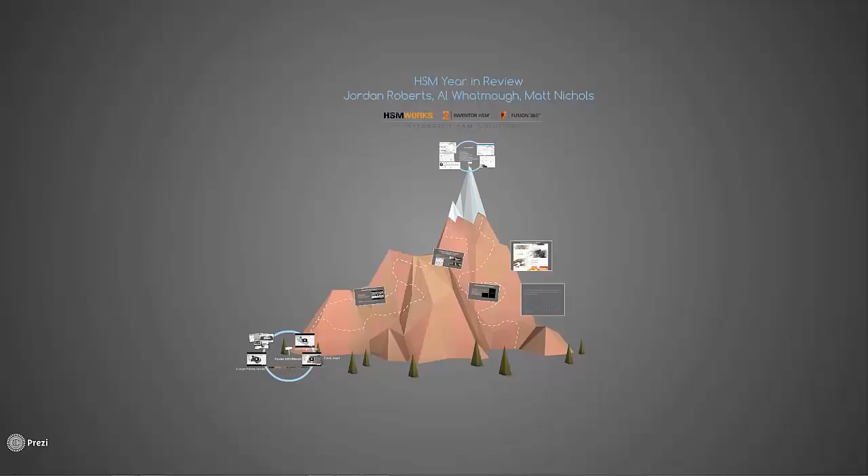All right, so we've got all that covered. We're going to hop right into the HSM Year in Review.

So Al, real quick, how's the mountain looking? I'll take Al's silence as it's looking great. Sorry, it's looking good, Jordan. I had myself on mute.

You're doing such a good job there. No worries. Awesome. So we're switching it up today guys. We normally do PowerPoint presentations, but I thought, look, this is the HSM Year in Review. We've had a lot of fun stuff happening. We're gonna take you on this journey, and it has felt a bit like climbing a mountain. So first of all, I'd like to introduce the Fusion 360 Ultimate Platform.

For those of you that don't know, Fusion 360 is the product development platform that is much more than just CAD/CAM. We're incorporating an IoT property of it as well. You're going to be seeing some absolutely phenomenal technology based around this platform.

This truly is at the center of what we call the future of making things. You'll see a lot of content out there from Autodesk describing how manufacturers have been forced due to consumer demand and changes in the marketplace to change how they manufacture products and literally retool their shops to be more competitive. With the introduction of Fusion 360 Ultimate, you will receive a lot of the capability that you'd currently receive inside of Inventor HSM and HSMworks packages. And the price point is just absolutely phenomenal.

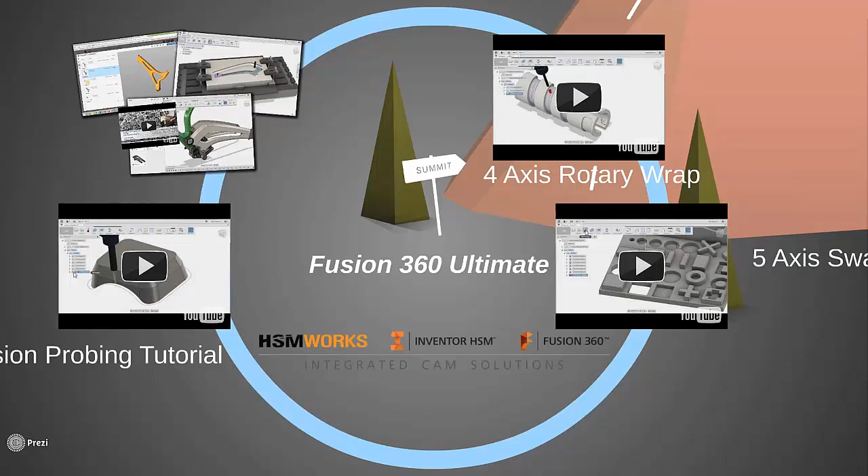I want to bring everybody's attention to this because really why it's important for our customer base is the Fusion platform allows you to collaborate with everybody on your team in a way that wasn't really possible before this product even came to market.

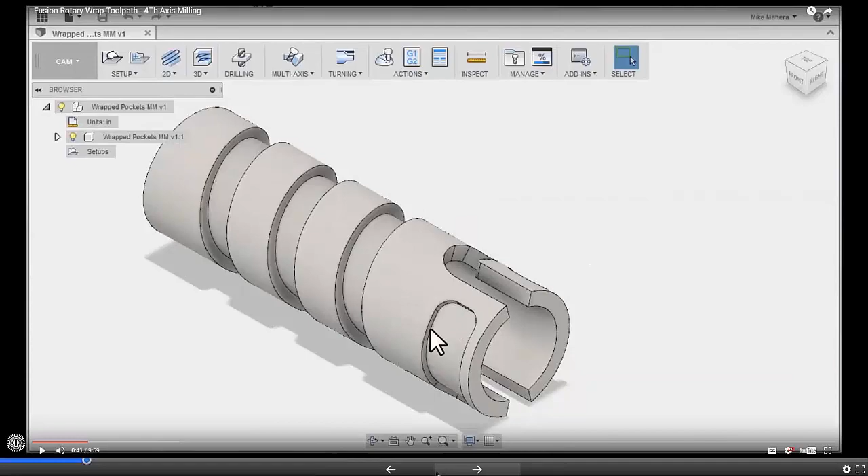Now we're going to jump in. Fusion 360 Ultimate, you've got 5-axis capability inside of it now. Again, Mike Mattera doing a great job, new to the Autodesk team, and just adding a ton of value with this content.

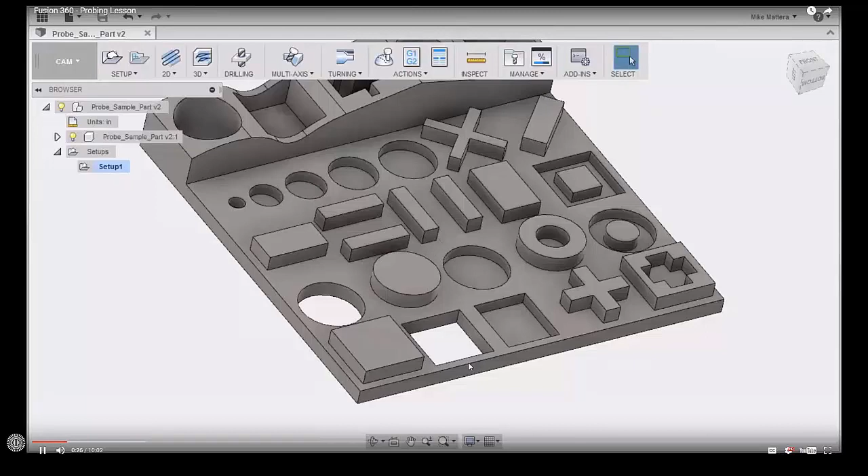Al, I believe you might even be able to show us some tips and tricks inside of Fusion later on. Is that accurate? Yeah, I think we'll show you some probing like this in Fusion. I think we might even show some 4-axis in Inventor and try and dive into a couple of the products later.

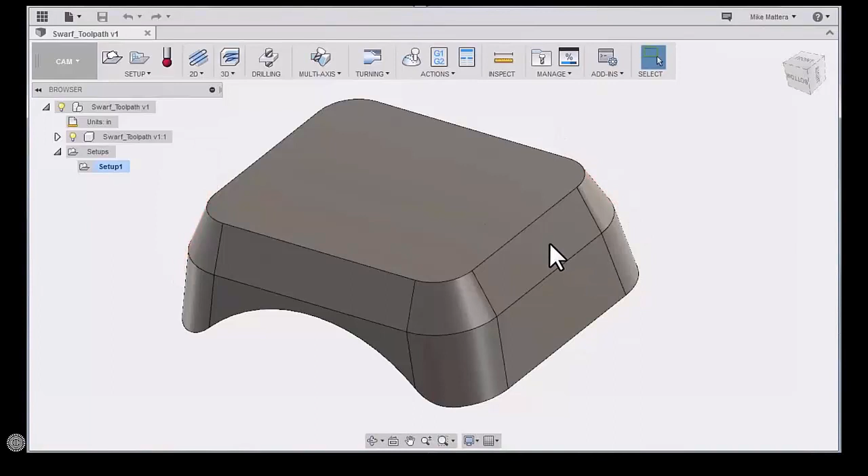Yeah, that's awesome. And I tell you guys, I've been really laser focused on the Inventor HSM and HSMworks platforms for about 2 years now, and seeing the speed at which the Fusion team is able to release new developments, new technology is just, there's nothing like it in industry. If you guys haven't tried this yet, you owe it to yourself and your business to download a trial and take a look. Especially if you're a SolidWorks customer, you guys are going to really, really love this stuff.

So as we continue our journey up the mountain, I want to take a quick second and stop on HSMworks 2017. Our SolidWorks customers have been patiently waiting for a release and some new capability.

Al, really quickly, could you just maybe touch on a couple of the things that we really want to be showing today inside of the SolidWorks platform? I think we might have lost Al there.

Anyways, we've got a new release of HSMworks 2017, and we're going to be showing you exactly what we're bringing to market here later on in the podcast. So I don't want to take any of Al's thunder, but you can read just as well as I can. These are some of the line items that we're looking for inside of that new release.

As always, we had a really big year with the education team. For those of you that have friends and family that are students and educators, you might have heard of the name Ivan May. We've been working very closely, and Ivan specifically, he's been working with the H-Techs. We've been getting in front of the students. The students have been rapidly adopting this technology.

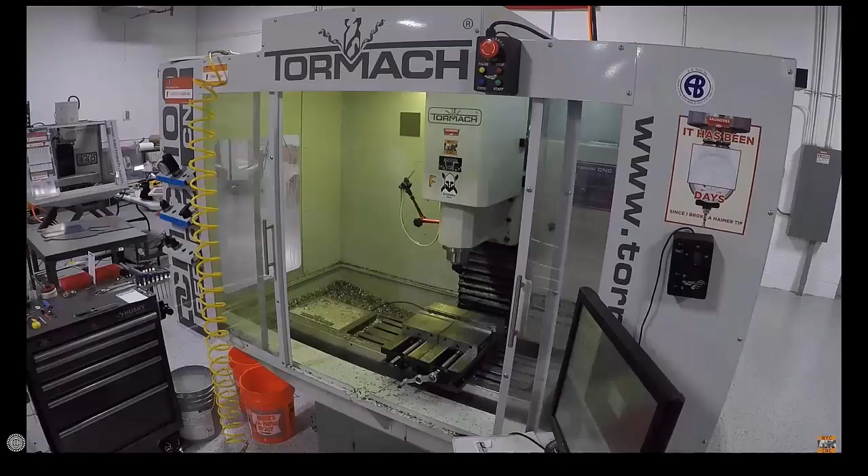And just really quickly, I want to dive into the precision pumpkin. This is John right here, and John uses a lot of Tormach. He uses Fusion. His channel is adding a ton of value here. What you're seeing is John setting up a pumpkin inside his Tormach machine. I understand a lot of you won't be doing this, but he's really providing the community with great resources outside of the Autodesk community.

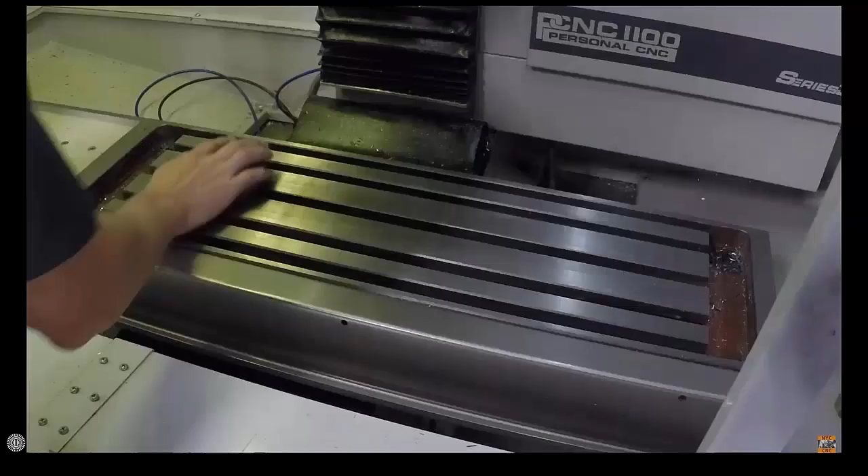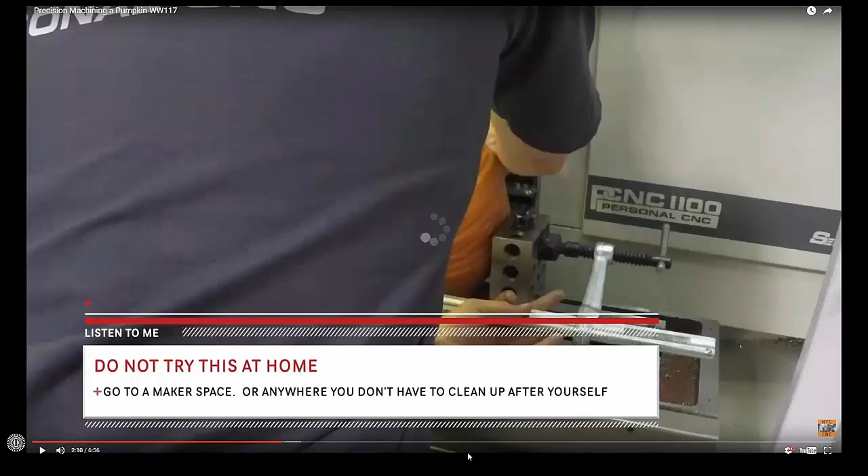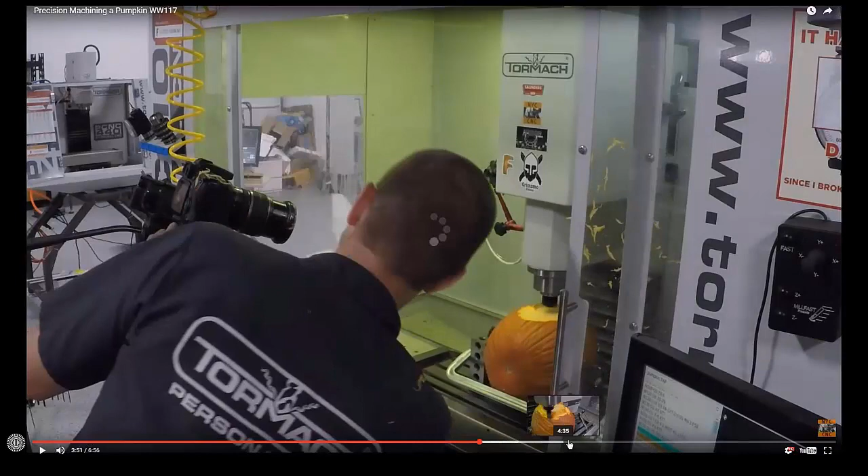We also have our Expert Elite program, which we'll touch on later. This is great - I wish the audio worked for everybody so you could see. We'll fast forward to some of the fun stuff. You can see we got our pumpkin modeled up here, and now we're making some seeds fly. Some pretty fun stuff here.

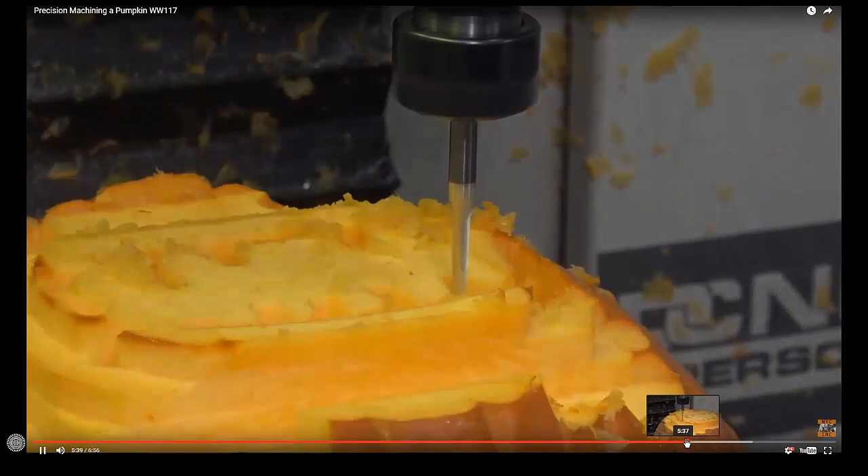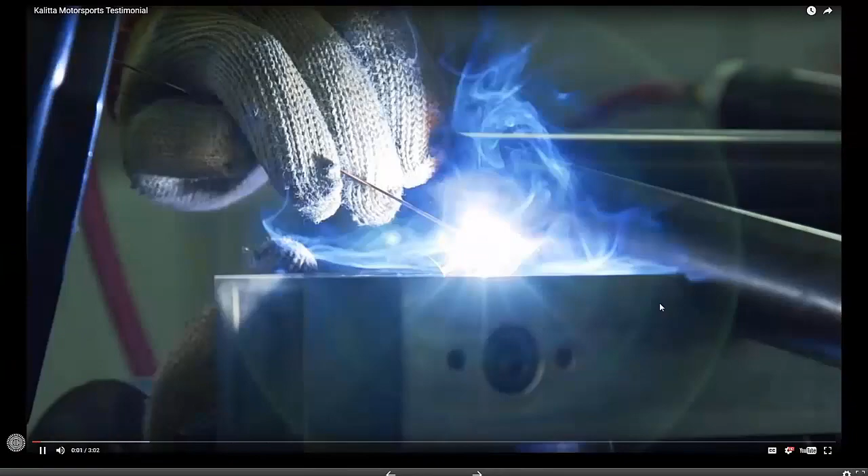I also want to bring attention to our partners, Kalitta Racing. These guys are doing phenomenal work, and they're using Inventor HSM. If you haven't seen this video already, please take a look. For those of you interested in motorsports, these guys have a great shop. They run Haas, they run fast, and they're always in the winner's circle.

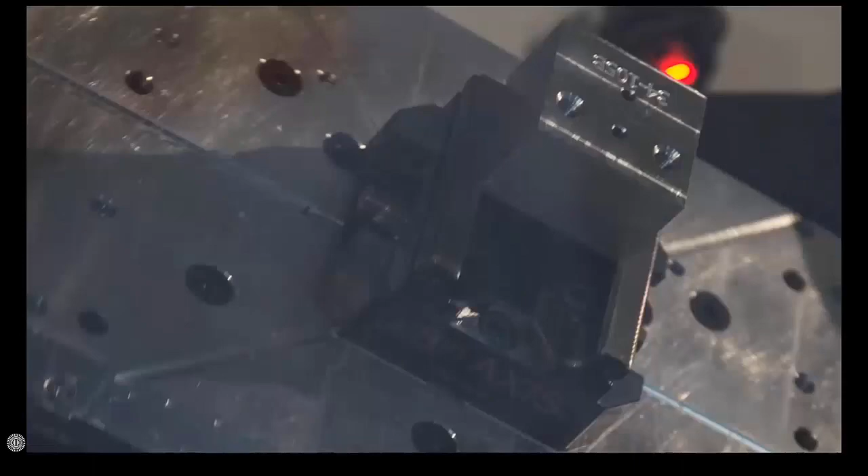Top Fuel Dragsters - that's a precision game. These guys were able to use Autodesk technology to really streamline their process and operations and become more profitable, more efficient. And that ultimately is what's getting them into the winner's circle. So here we're looking at Inventor HSM Pro. We got Tim Evans.

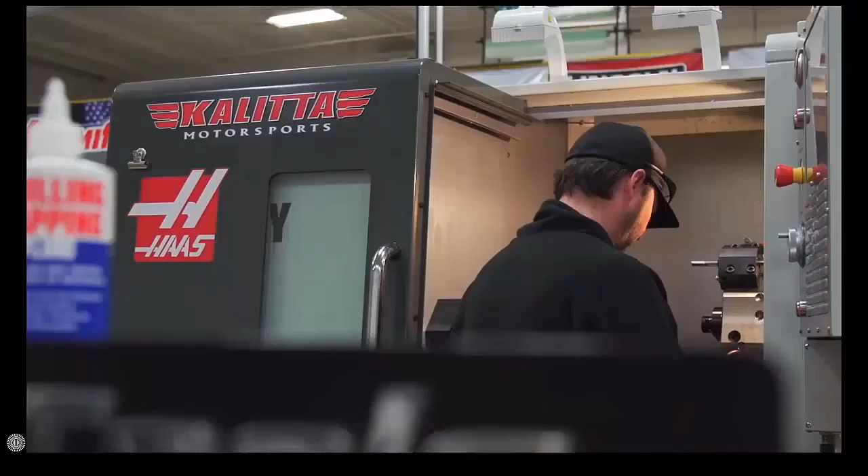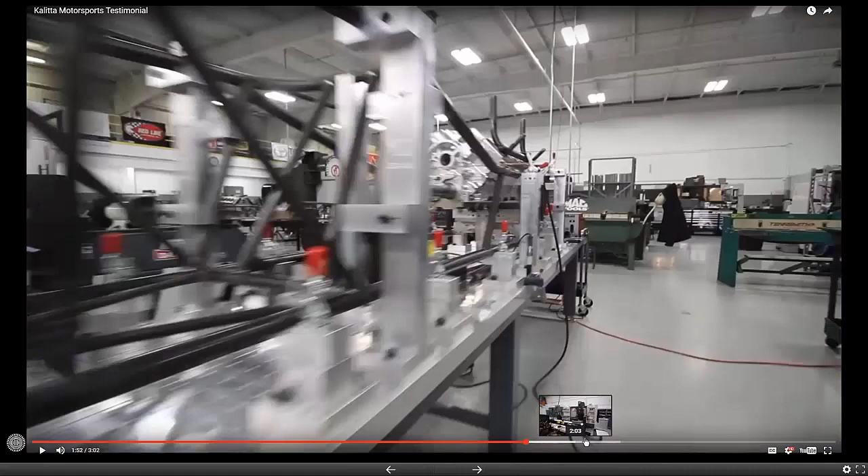I'd encourage everybody to follow Kalitta Racing - they've got some really great stuff going on over there. You can see some of the parts they're making with Inventor HSM technology, just great stuff - really, really short cycle times, really short programming times. And that gets back to the nature of why we're all here: it's that integrated CAD/CAM workflow that's truly changing our industry.

It doesn't matter whether you're on Inventor, SolidWorks, or the cloud - it's all good, the workflows are all the same.

I'd also like to highlight Titan. Our boy Titan over at Titans of CNC has launched a free training program. For those of you looking to step up your career, this program is completely free. You can sign up at academy.titansofcnc.com. Here's Titan talking about how he's able to give the software away for free because he's got his awesome TV show, which if you haven't seen it, please check that out as well.

I've been through some of Titan's program, and I can tell you this is not a marketing thing, guys. This is Titan truly giving a phenomenal free education platform for those interested in the HSM workflow. You're going to learn a ton, but it's much more than just software - Titan's actually showing you how to start your own machine shop, how to be successful, how to compete, how to run fast, and how to win.

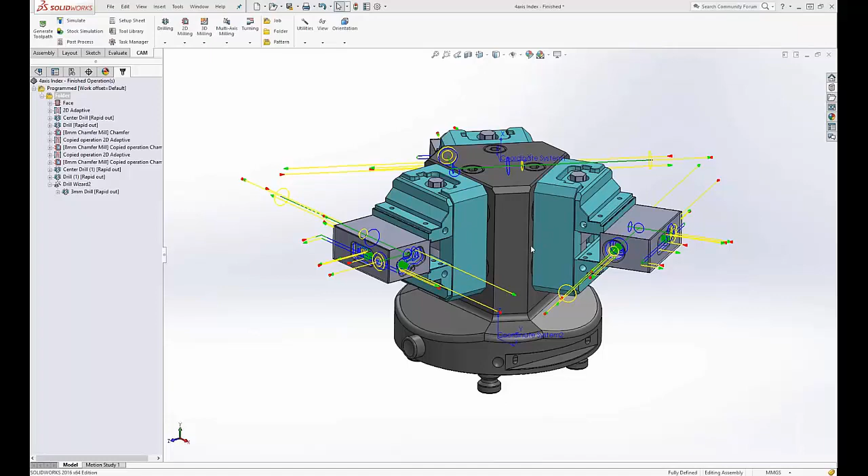Okay, so this is an example of some multi-axis positioning, no new toolpaths that I'm showing in this one, but I wanted to draw attention to some of our users using third-party simulation tools. That could be something like a CAMplete, it could be a VeriCut, it could be an NC Simul. Many of these tools give you third-party validation on your expensive machine tools. You don't want to check your own homework, you want to sometimes use a third-party tool.

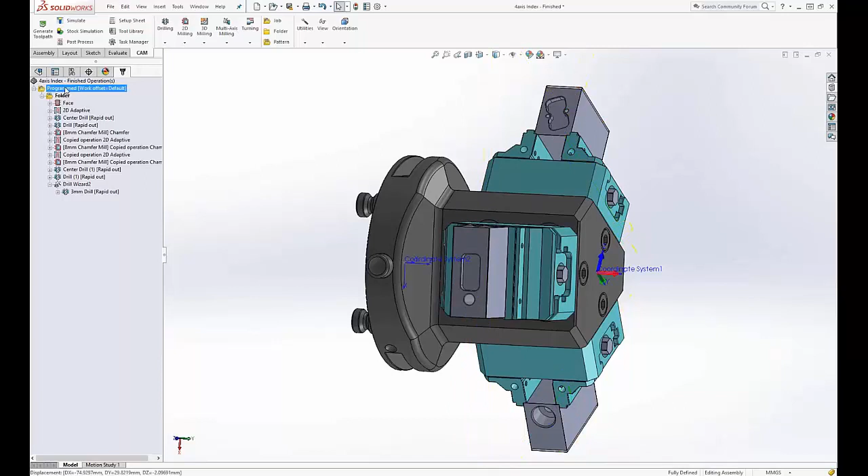And what we've done for those tools, and you'll continue to see additional post-processors for some of those that appear in the near future, if you look in the work coordinate system, in the model, the fixture definition area, there's now a spot where you can define the fixture attach point. And it may appear that that doesn't do anything.

And it doesn't when you're simply using the product as standalone. But when you go to use one of these other post-processors, we can package up the stock model, we package up the tool path, we package up the data about the tool, and that passes over for this other simulation. This gives you a place so that it's a single button click to import into these other tools and do your simulation. So that fixture attach point is going to be helpful for some of those advanced workflows for those third-party solutions.

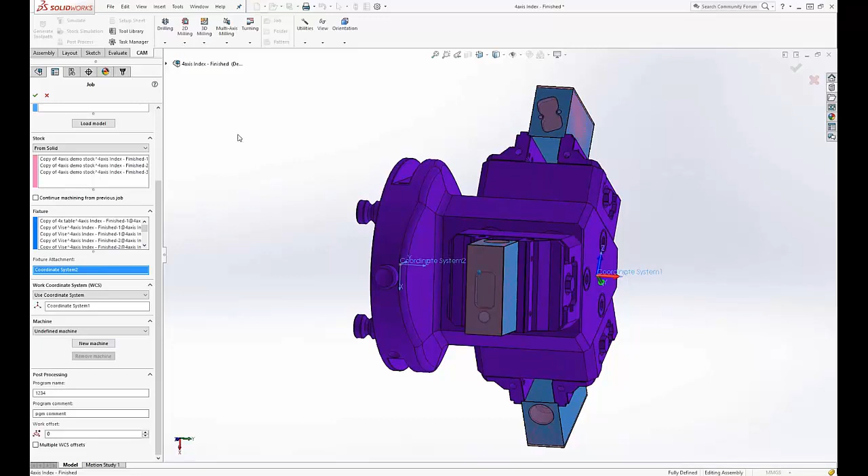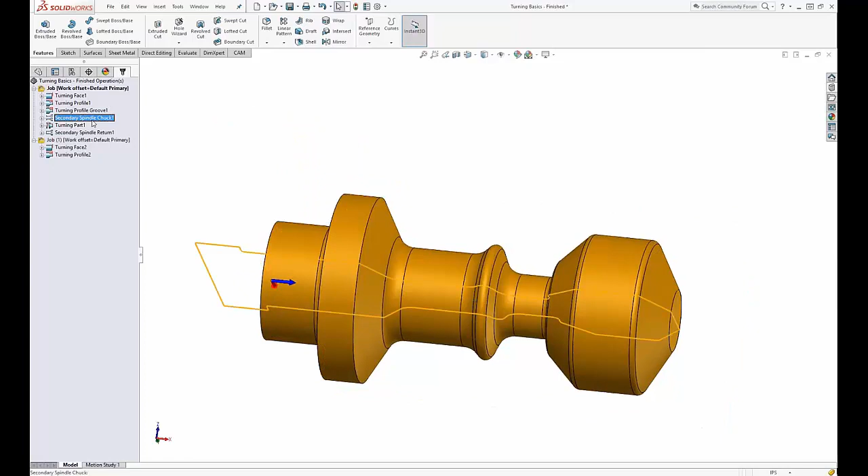The next thing I wanted to show, which is rolling out in both Inventor HSM and HSMWorks 2, and will be in Fusion very shortly, is our updated secondary spindle operations: spindle chuck and spindle return. In this case, I have a job machining the front side of my part, then I'm going to part it off and finish it in the secondary spindle. I need to come in, grab that part, and transfer it. You'll see an option for spindle chuck to grab on. We can perform this parting operation and return that secondary spindle back to start doing the work.

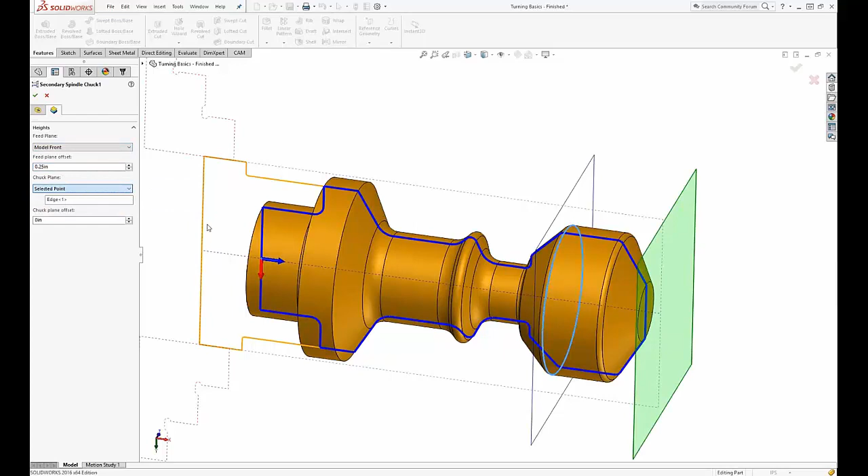Some things you might notice start to highlight where we're headed with confinements in turning. If you look at the heights plane for where this chuck happens, it's starting to look more parametric, like our drilling operations and planes in milling, where we can reference from the front of the model plus an additional offset. We can grab onto a selected point, reference from the stock back or stock front, starting to make more associative relationships to these sorts of planes. So expect to see the same sort of thing trickle into how we confine our turning toolpaths.

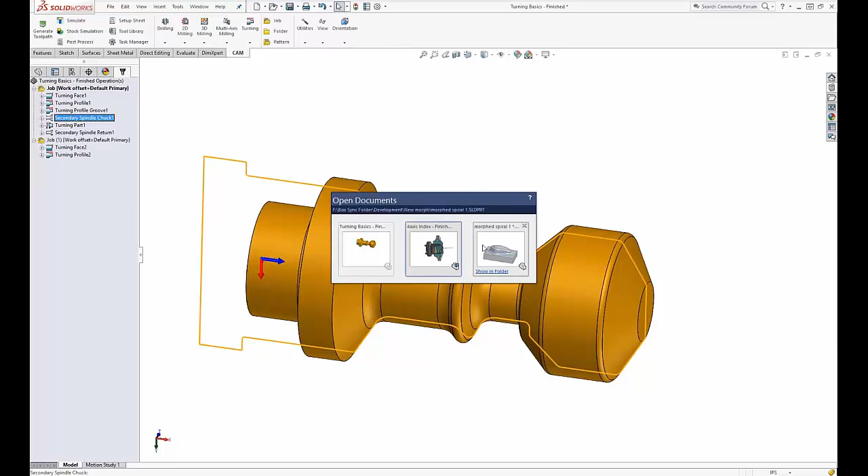I think that was worth pointing out. The last thing is something that's in beta mode. There's a few people on the webinar today who may already use beta mode. If you're not using beta mode, you can. I don't suggest using it in production, but we do like to expose the stuff we're working on that's getting close, for you to test and see how it's going.

Beta mode is easy to turn on, so here's a little hint for those who took the time to join the webinar. If you hold Control and Shift and right-click, you'll get a new right-click menu. This appears in both desktop products. It's a slightly different workflow in Fusion, and you have to be more careful there because it doesn't automatically turn off when you reset. In our desktop products, if you restart the application, you won't be in beta mode until you force it on.

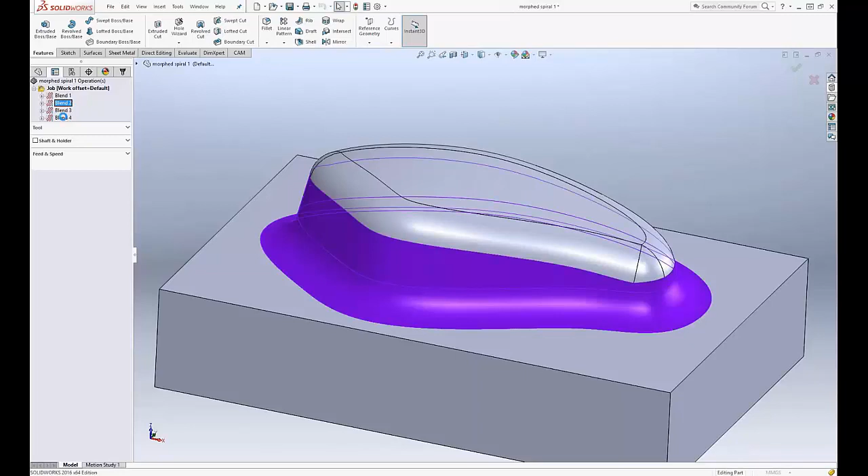But here's some new toolpaths coming out very, very soon. It's our blend toolpath - I think Rob Lockwood started the Instagram tag 'blend is the new flow.' You can test this now, where it allows a constant step over across a series of surfaces, useful in situations where you may have used flow in the past without setting up the ISO curve. It's as simple as setting the faces I'm machining, and it essentially morphs between the two. This will be the foundation for some true 5-axis finishing too, since we've now got toolpath lines laying correctly across the surface.

Neil is mentioning in the comments that he started the 'blend is the new flow' tag. So not only is he all over our forums, he's all over Instagram and part of these webinars too. Another shout out for you, Neil.

I'm definitely looking forward to seeing what you have. This is a great place for you to engage on the forums, engage with us socially, and let us know how it's going. These beta features are actively in development, so we can provide quick feedback when you're finding things - please continue to share it with us.

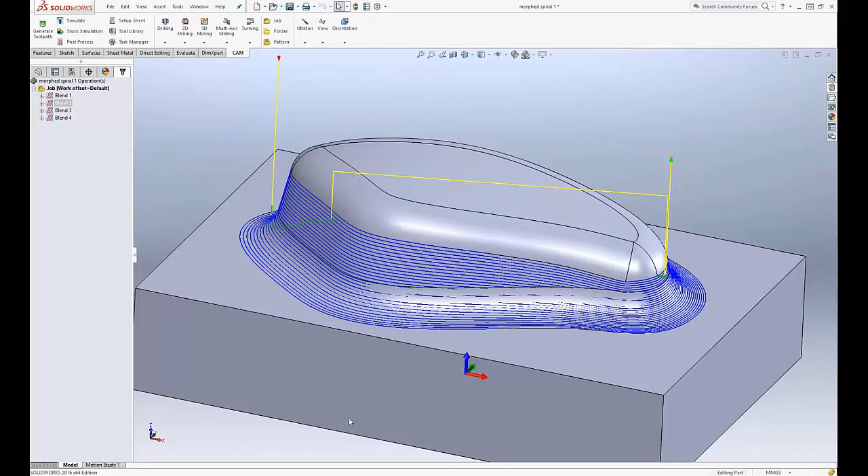I see some people asking about beta mode and Fusion, so that's probably a good chance for us to transition over to Fusion. There's obviously a lot more happening in HSMWorks, but let's try to hit all three products here.

The first thing I want to draw attention to is that over the course of the year, we've really put a lot of effort into making sure we deliver a solid set of example files, so you can reverse engineer what's going on in the software, and new users can see how to use the product in different scenarios. If you're helping other users, teaching, or answering questions, I really encourage you to go to those sample files. If you want to share stuff with us that you think would be useful, please reach out.

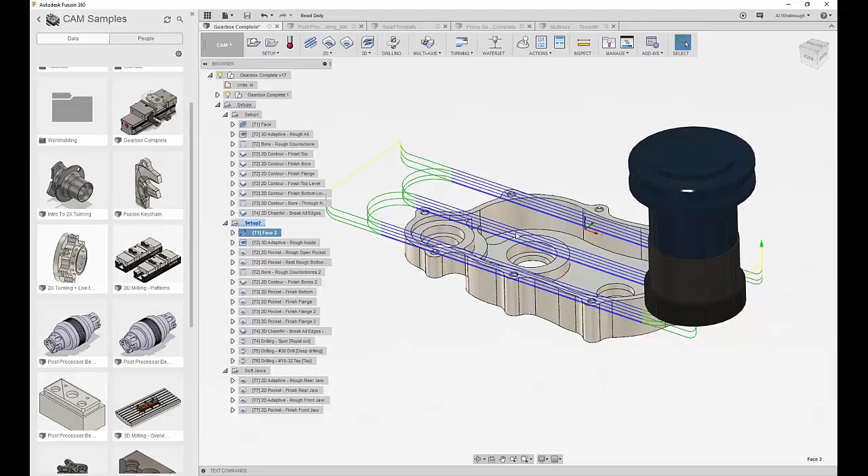In this example, I'm showing a gearbox housing, with maybe a couple of neat little tricks. I can show how I've got two sets of vices that I can toggle on and off here to define each of my setups. In this case, it's my second setup.

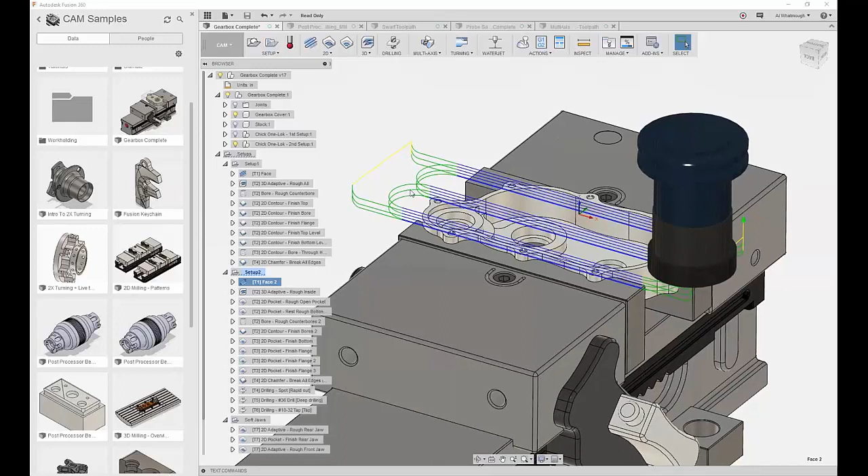I'm facing off a lot of material, and this is one of those quality of life things. In the past, the facing operation was simply a pattern down—if you ended on the left side of the part, it would always return to the right side to do the next layer, just repeating the same toolpath going down. But we know if you're over on the left side, why not just work your way back and forth? So now when you use multiple depth cuts on facing, it'll work itself back and forth across the part for those multiple Z cuts. Hopefully you find that helpful.

I'm going to throw this in there because there are a few beta things to take a peek at. I just enabled text commands. I want to shout out to Benjamin Bowles—great products, a great user helping a lot of our users too. You didn't get a shout out for being an expert elite, but I'll answer your question live here. Beta mode in Fusion is cam.betamode, and you do a slash-on to enable it, slash-off to disable it. The one thing I need to make you very aware of, for those who've used beta mode in the desktop products—when you turn it on in Fusion, it will remember it even after a restart, so please make sure you turn it off after you're done testing the new features. There could be some kernel things also in beta mode that you might be unaware of, so make sure you turn it off when you're done testing that new functionality.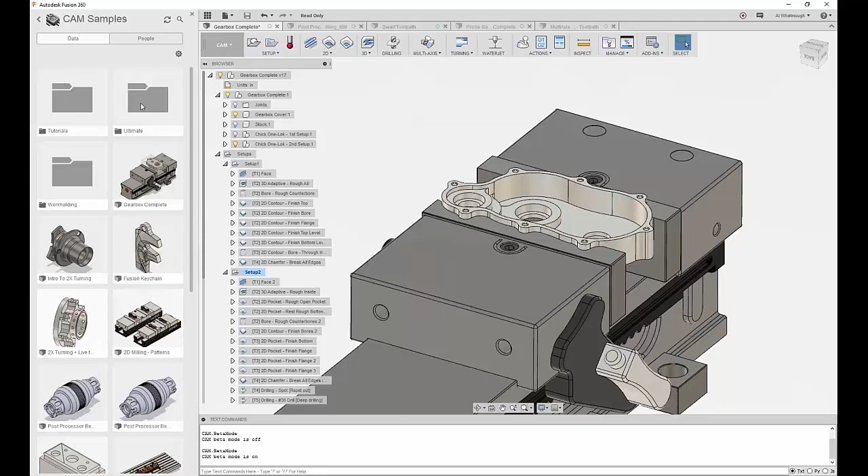I'm going to turn it on quickly though, because there's another neat little thing I want to show here. So let's turn beta mode on, and let's jump over to probing, because that was one of the new things that came in Ultimate. Remember, there's a folder now in the tutorials or samples to show Ultimate features. So let's go to probing. If you haven't launched this file, I'd launch it—you can start to see some of the scenarios where probing can be utilized to set your work coordinate system in process. I think the guys did a very good job of how probing is implemented.

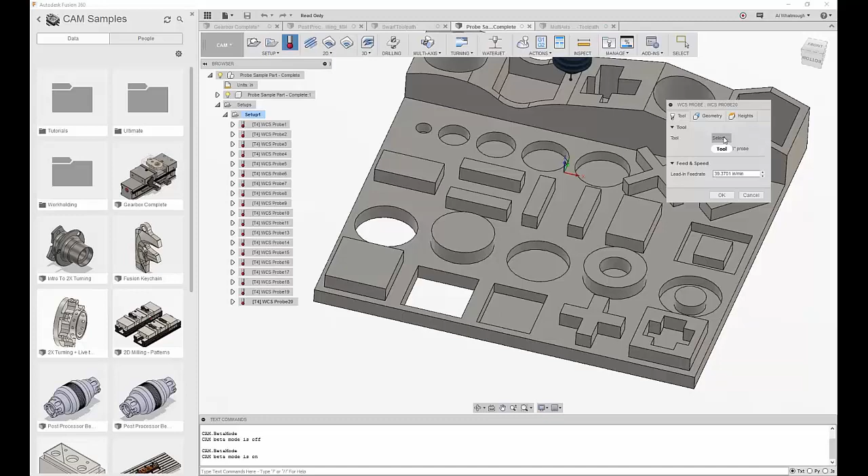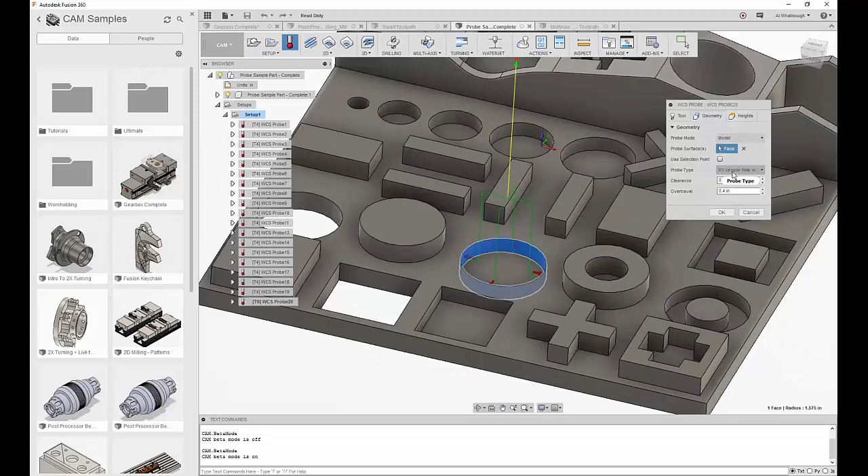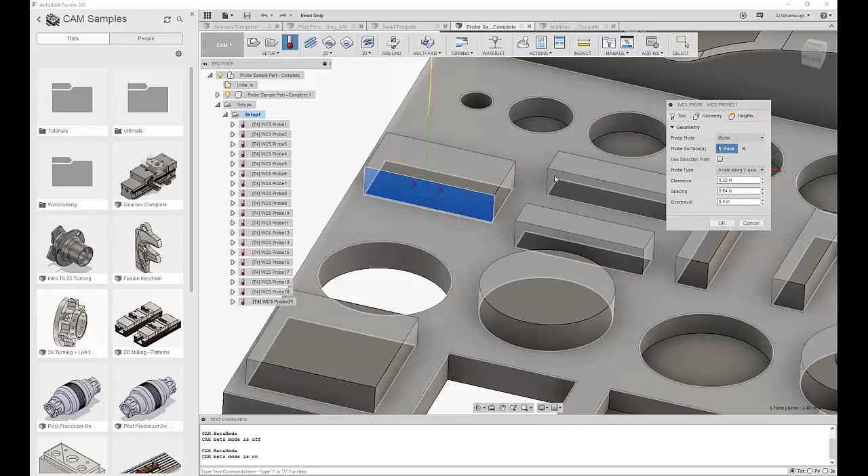You simply make sure you've selected a probing tool—we're shipping with many of the probing tools that come with the Haas machine. When you pick your geometry, it automatically makes the correct type of selection. So I select a cylinder, and we're automatically probing that bore. If I select an inside bore, we're automatically going to probe it, but using clearance—in this case assuming there's an island to avoid collisions. You can always force it to do something different if you don't want that extra motion. I also enabled beta mode, so here's a little trick to play with: when I select a single face in the X or Y plane, it defaults to Y surface, but in beta mode we now have the ability to define the angle along that Y surface. It is in beta mode, meaning it's not supported in all the posts yet, but a little trick for those who joined today.

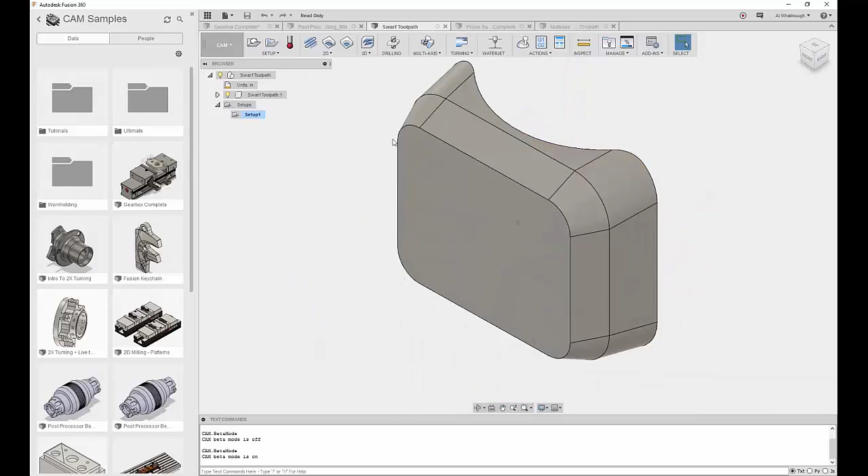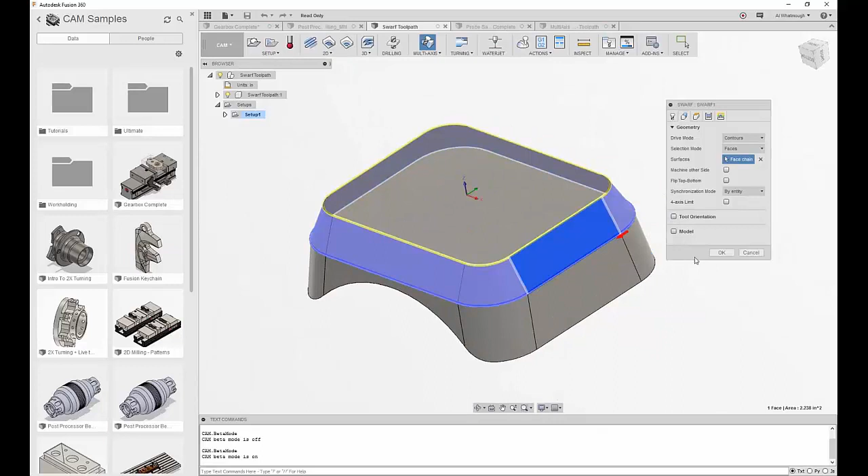The next thing we want to look at is our true multi-axis toolpaths—multi-axis swarf and multi-axis contour. You can see using the tip of the tool driving along a curve, and in the case of swarf, we're using the side of the tool. Let's do that one quickly. Again, I'll grab a tool from my library—we're filtering out the tools that make the most sense. In my geometry selection, I can grab a series of faces that automatically select the tangent faces, so in just a few clicks I'll have a swarf toolpath around this part. Don't assume it's limited though—you can come in here and adjust the cutting mode, take a look at the tool tips, and really see what you can do to leverage swarf.

Now the last thing I should probably mention is some of the additional 5-axis functionality that's a little more hidden inside all of the products.

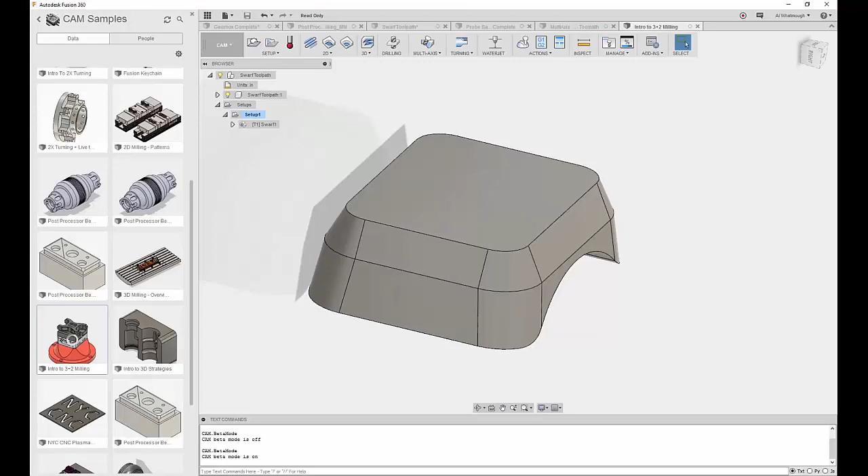It was brought to my attention that some users find the tool orientation confusing. With any one of our 2D operations, inside the geometry tab, you have this tool orientation that programs the rotary axes to reposition and machine a different side of the part. That tool orientation is your other method of 5-axis machining within all three of our products.

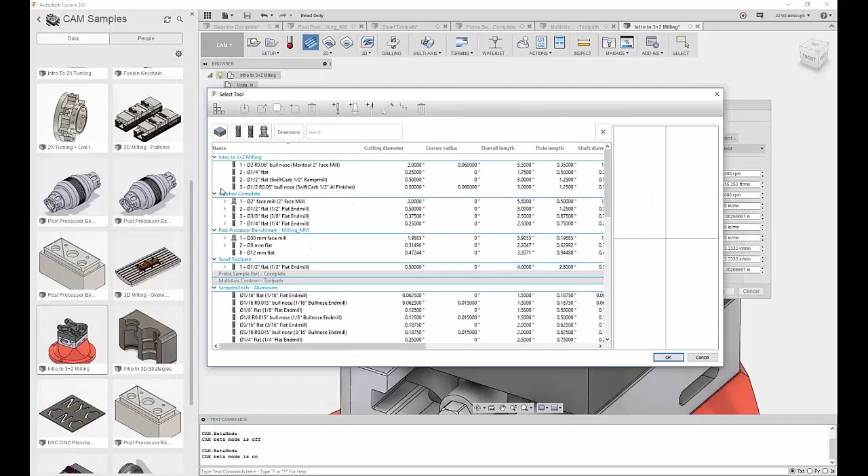The confusion, which many of you may or may not be aware of: if I have no setups and I start any operation, like a facing operation, you'll see that it automatically creates this setup on the fly so I can begin machining. I simply select a tool, say OK, and this operation was created automatically, but we defaulted to a Z direction that in this case was incorrect.

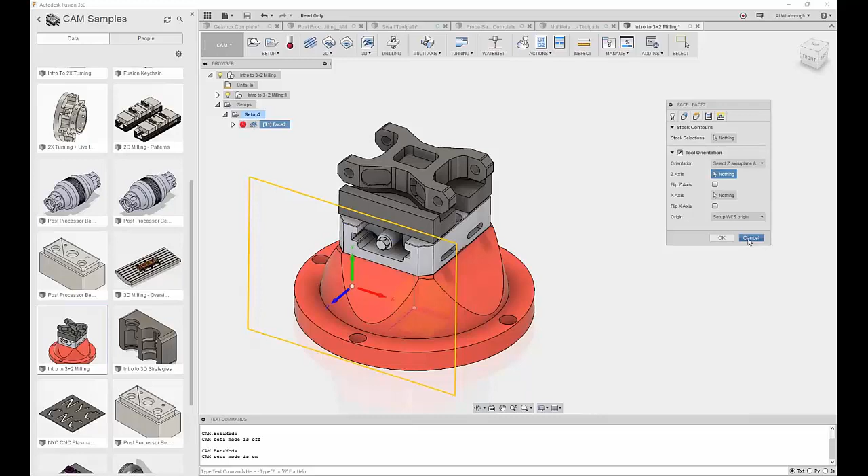Some new users go into this facing operation saying, oh, I'll fix that with tool orientation. That's not what tool orientation is for. Tool orientation is for programming the machine to tip the axis over. In this case, since the setup was created on the fly, we should edit that and redefine the direction.

I'll throw in another quick trick - sorry for dragging the webinar on long - but I see a lot of people using the software not knowing you can graphically manipulate the origin. If you click the stem of any one of these three axes, you're now in a mode where you're defining the direction of that axis.

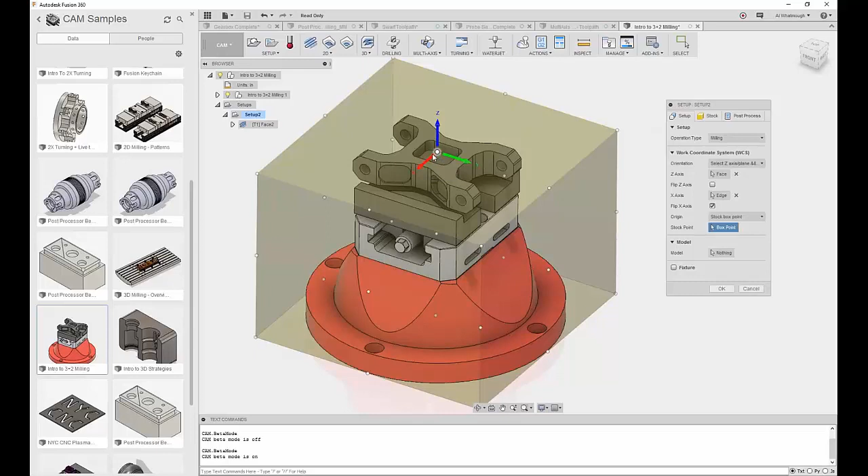I could click the stem of the x-axis and pick a perpendicular face, a cylindrical face, or an edge, and it would align perpendicular to a face, along a cylinder, or along an edge to define the axis direction. We can also use the arrows on the end to flip it, and if you click the point, we can then define the node. So a couple little graphical tricks for how you can manipulate that coordinate system - that's been there all along, but I felt I should show that.

That's the 5-axis. The last little secret 5-axis toolpath, if you will, is inside 3D Contour. Here's my other little trick: shaft and holder detection is a super powerful technique for ensuring you create 3D toolpaths that don't collide with your model. It takes the holder and shaft into account and calculates a toolpath that won't collide. But in situations where you still get a collision and want a short tool, part of what Fusion Ultimate delivers - and again, this is in all 3 of our Ultimate products - is something called multi-axis tilting.

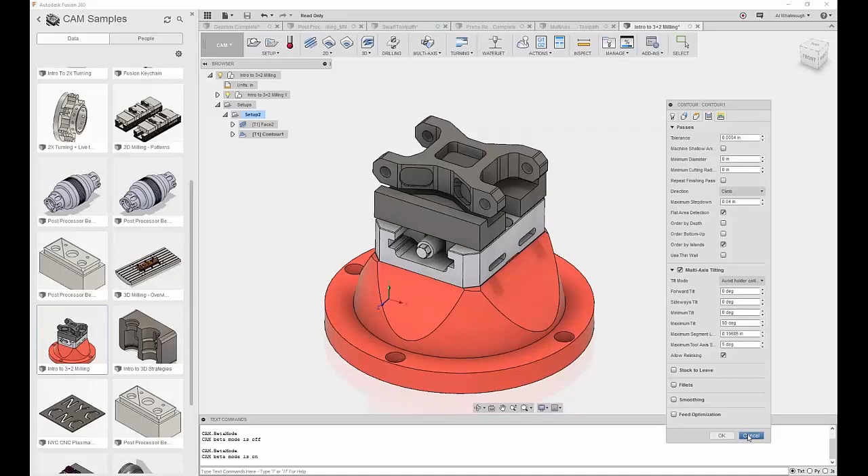So now, instead of moving the tool out of the way, it's going to tip the tool over, produce the same cutter path, but tip the tool over so it avoids a collision and uses all 5 axes of your machine to get at the part. Another little quick thing to look at, and again you can find that in any one of the 3 products.

The last thing I wanted to show is the work holding folder. Some of our partners have reached out to us and let us know we could share their geometry for their work holding devices. So Raptor Work Holding has generously shared much of their work holding products, now available in the product to make it very easily accessible to you.

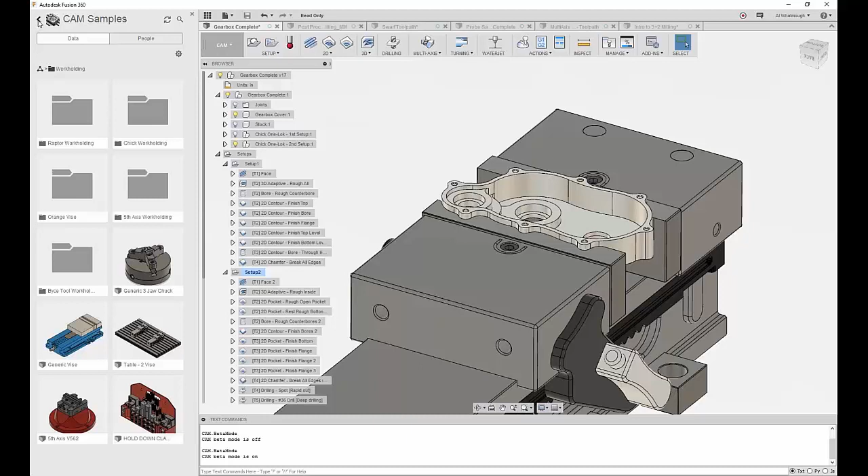Chick, 5th Axis, Orange Vise, Bryce - we continue to get contacted by more and more vendors and feel like this is another way we can improve the experience for you, so you're not stuck recreating the models of devices that are the same for everybody. So keep an eye on that, we'll continue delivering updates inside there.

There's a question regarding shaft and holder detection, so I'll clarify that it's available in any one of our 3D toolpaths. If you have one of our HSM-based products with 3D toolpaths, you can use shaft and holder detection. You need the Ultimate level if you want to use the 5-axis tipping or tilting to take that to the next level. So there's a couple quick tricks to share.

I'm going to go ahead and turn cam.beta mode back off again so I can make sure that when I'm doing my production work I don't cause problems. And I need to make sure it's off because, if you didn't know, we didn't put it in the year-end review, but our Matsuura 330 just showed up at Pier 9 and we've been having a lot of fun getting that up and going.

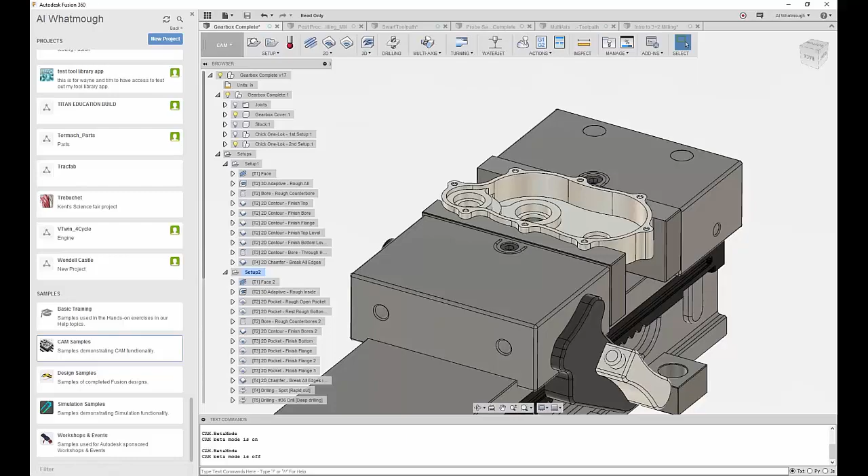Absolutely can. So in Inventor HSM, a couple of things I'm going to show is the 4th axis wrapping that we got. It is awesome. It's super easy to use. And then I'm going to show a couple other tips that can kind of help speed things up.

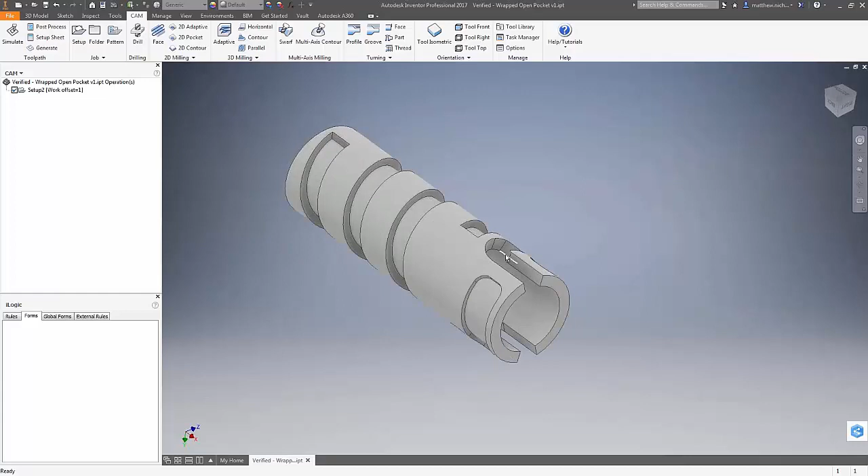So first thing I'm going to show is on this part, I'm going to do some 4th axis wrapping, doing pocketing through these little grooves, adaptive in the pocket, and contouring in here. And so you can see how easy it is.

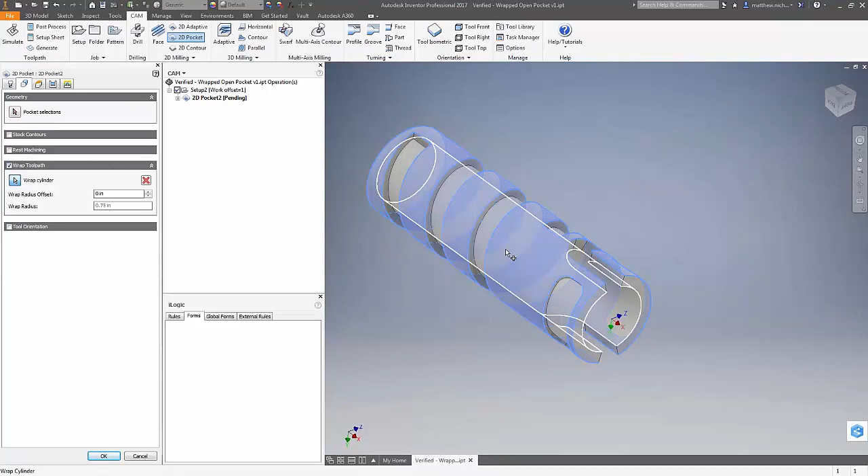First off, 2D pocket. I'm going to go in there and pick my tool. I've got little 1/8 inch bull nose in here. And then I'm going to go in my geometry tab, and here I'm going to go wrap toolpath. And I'm just going to pick the outside diameter of the part. And then for the pocket, I can just come in here and select there. So a couple clicks, I've got that. I can hit OK, and then we've got our 4th axis toolpath wrapped around there. So pretty easy and really awesome.

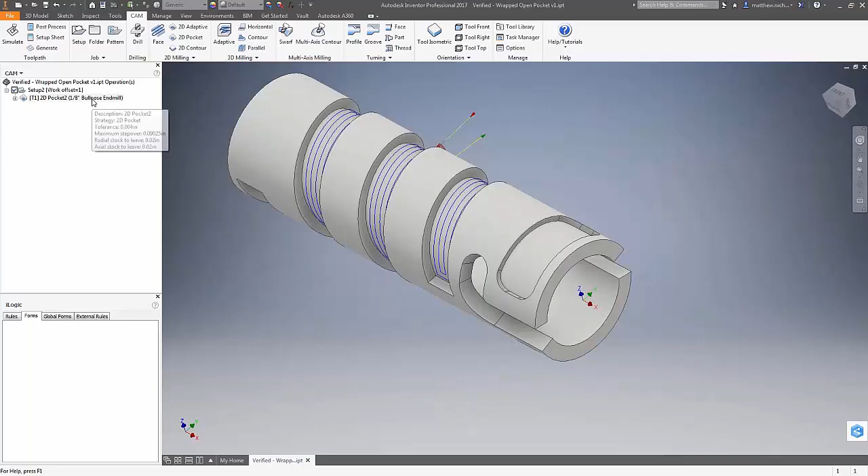Matt, can you do me a favor? And I think it bears mentioning because there is some confusion around it. Can you open that toolpath back up and just show the geometry selection? We could do an entire video on this, but I think it's important to know that the wrapped cylinder that you're selecting is where the tool is going to be correctly following the geometry that you defined.

That's an important note because it's very difficult to model the correct 4-axis geometry without knowing the diameter of the cutter. It's going to in some way gouge the part unless you took the diameter of the cutter into account when you modeled the part. So defining that wrap cylinder is going to control where the toolpath is correctly following the geometry selected. And you've got some flexibility in how you adjust that. So I'd encourage anybody using 4-axis just to play with that function, try and better understand it, and keep an eye out for videos in the future that explain it in more depth.

Thank you, Matt, and sorry for the interruption. That's cool. Yeah, and like we talked about before, Mike Matera has some awesome videos on operations like this, so it really explains a lot better in detail what's going on. So I highly recommend looking up those videos on his YouTube page.

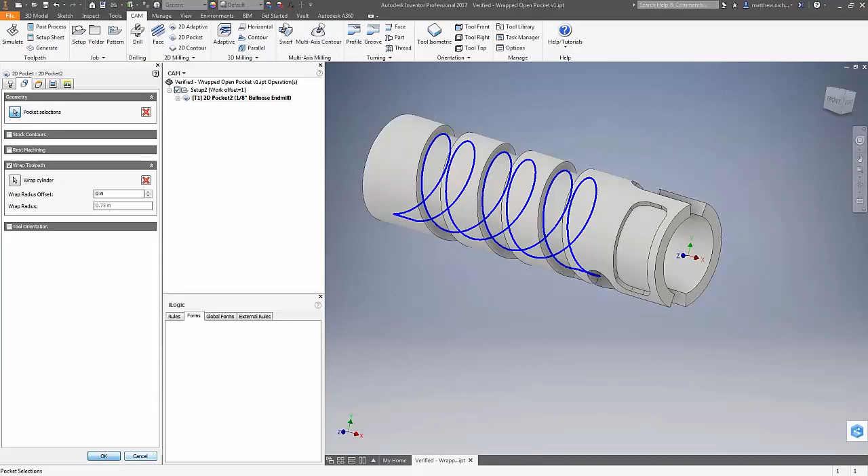So then with that, I'm going to go ahead and do an adaptive in this pocket. So again, 2D adaptive, keeping the same tool. Turn on the wrap toolpath, and then I can pick the outside diameter again, or I can come in here and pick this. So kind of as Al was mentioning, depending on which surface you pick is depending on how the tool is going to go. So I'll pick that bottom surface, and then I'll just pick this bottom contour.

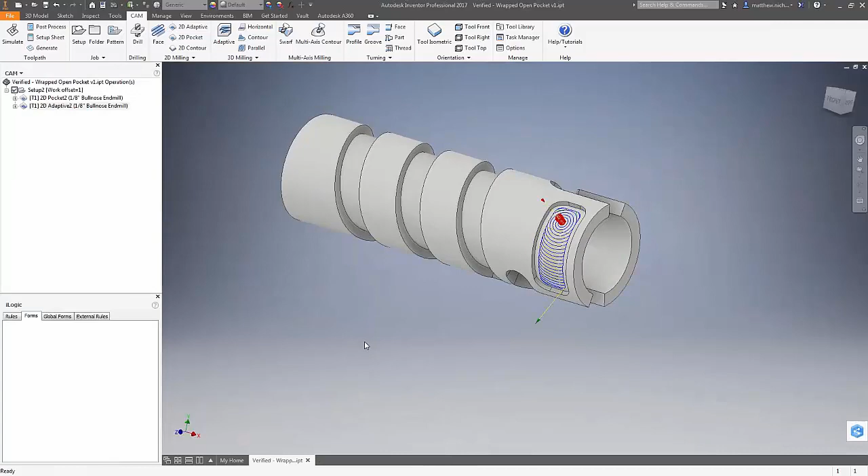Okay, and then let's do just a quick simulation on this, just to see kind of how things are going. And it's really fun watching this. So while we're watching that, a quick response to Lauren. We got some power users on here today. Wow, Lauren thought that it was worth bringing up.

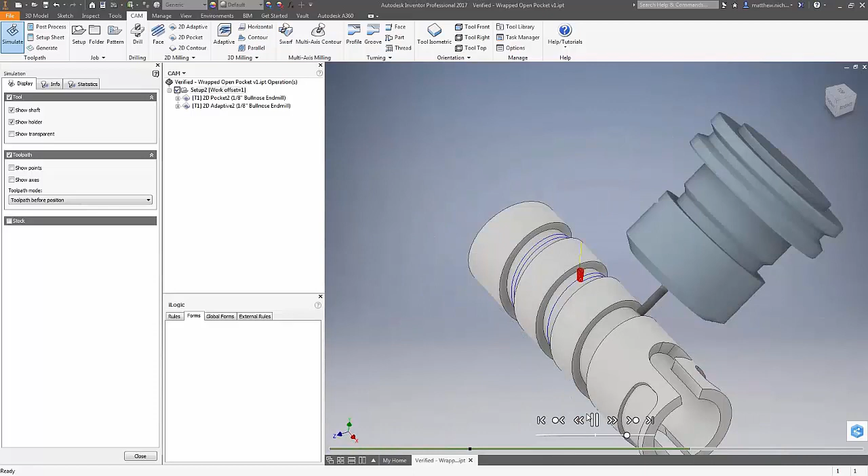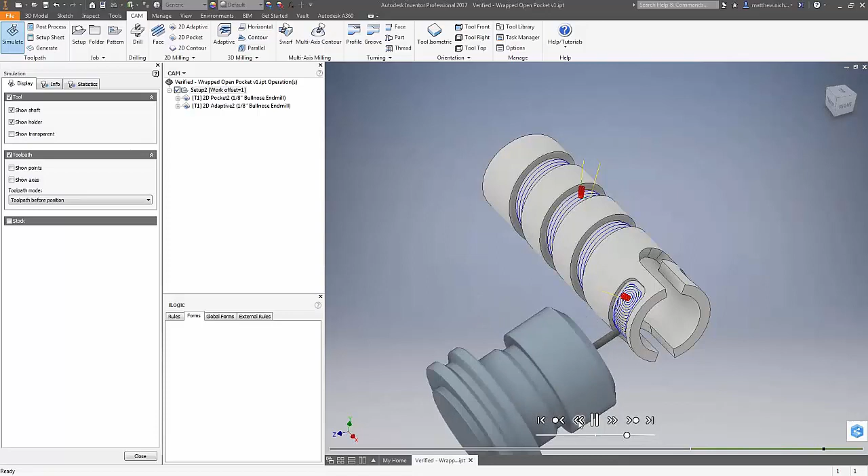There is some similarities and some differences between HSMworks and Inventor HSM in regards to 4-axis. In HSMworks, very early in the new year, we'll have this same wrapping of 2-axis strategies. Today, HSMworks users have the ability to wrap 3-axis strategies, and what we've released in Inventor HSM and Fusion is the ability to wrap 2-axis strategies.

There is a reason for it in regards to how the part can sometimes be gouged when wrapping 3-axis, but you can effectively machine the same types of geometry in HSMworks today. Watch for an early release in the new year with this identical functionality though.

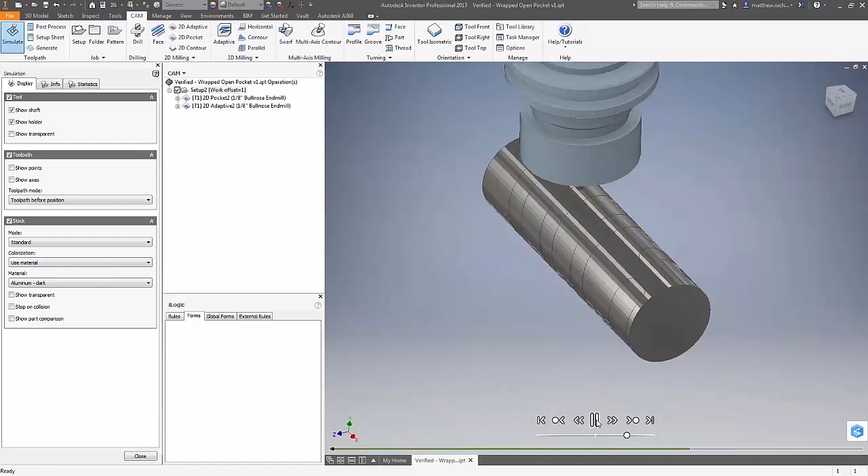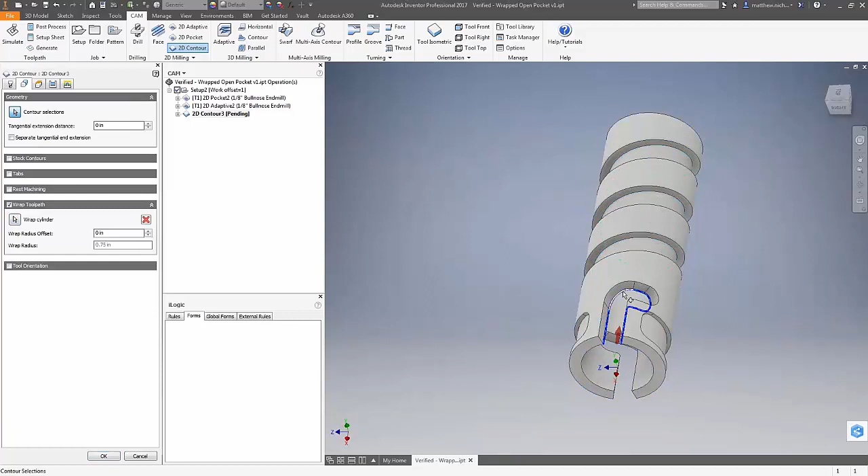The last one I'll show real quick is the 2D contour, doing the wrapping. So here again, use the wrap tool, pick the contour, and then grab both of these. Super quick and easy - that's basically the 4th axis wrapping.

Next, I want to show a couple tips. As I showed in beta mode, Inventor HSM has beta mode as well - Control Shift right click to enable it. One new thing we have is this line indicator. In the past, if you had multiple setups in a part, you might not know exactly where that toolpath was going to go unless you checked the checkbox on the setup. Now there's a clear indicator of where it'll insert the new toolpath - wherever you drag this line is where it goes. Awesome update.

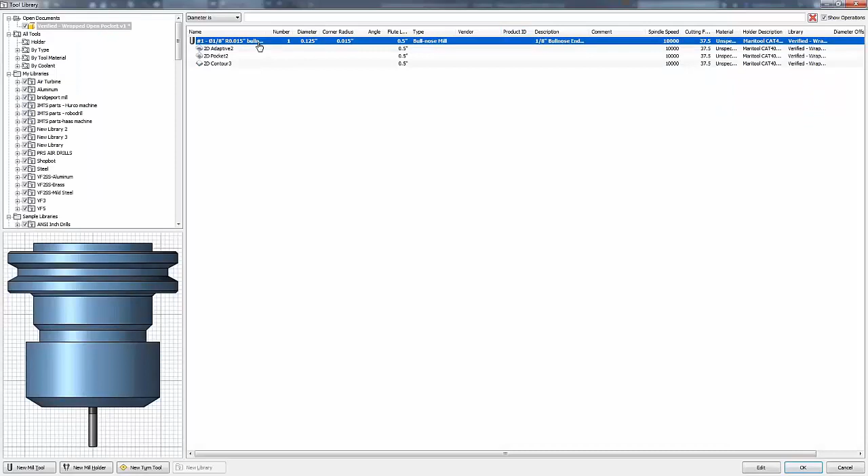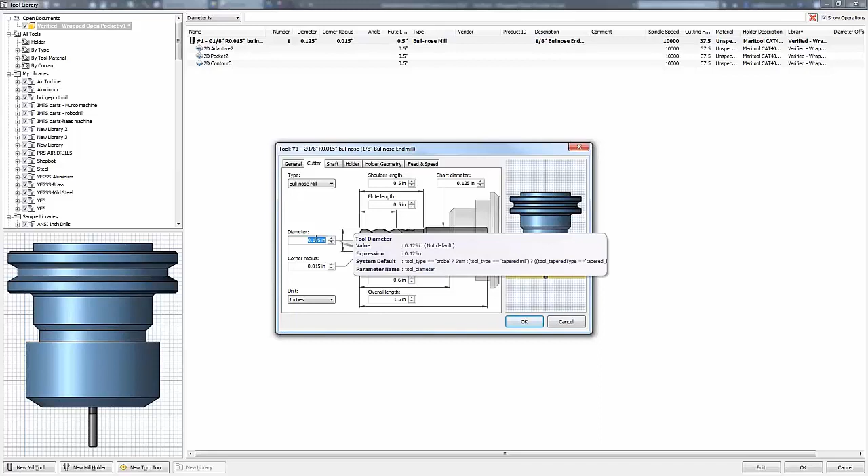One tip I like to show a lot: if you ever want to use tool information inside your step over and toolpaths, you can always pull parameters from your tooling or anywhere else in your operations by holding down Shift and hovering over the diameter. You can see the parameter name that will be pulled, or that you can use to do calculations.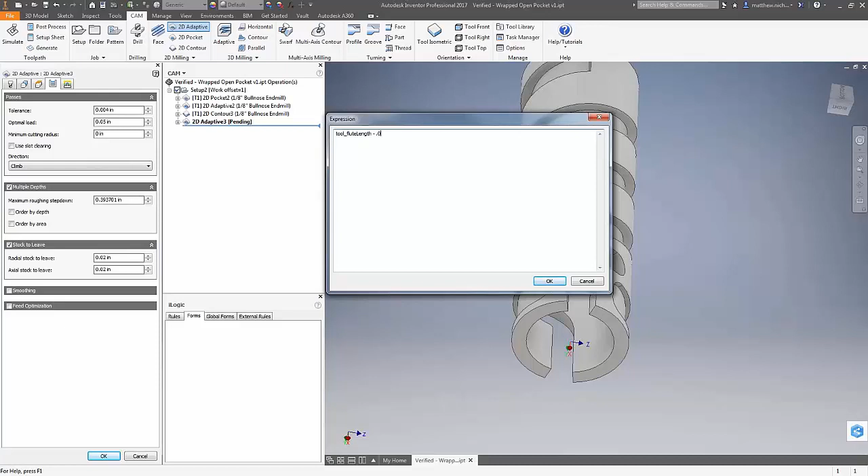For the tool diameter, one thing I like to do is go into a 2D adaptive, and let's say for optimal load - this is doing percentage, but it could be anything else - I can do an expression, and you can see the tool diameter here. So there are quick and easy ways to do calculations based on tools, tool sizes, or even step downs. If I'm doing multiple depths, I can do tool flute length minus whatever you want to keep off the end. Different ways to speed up workflows.

That's great, Matt. Thanks for the power tips.